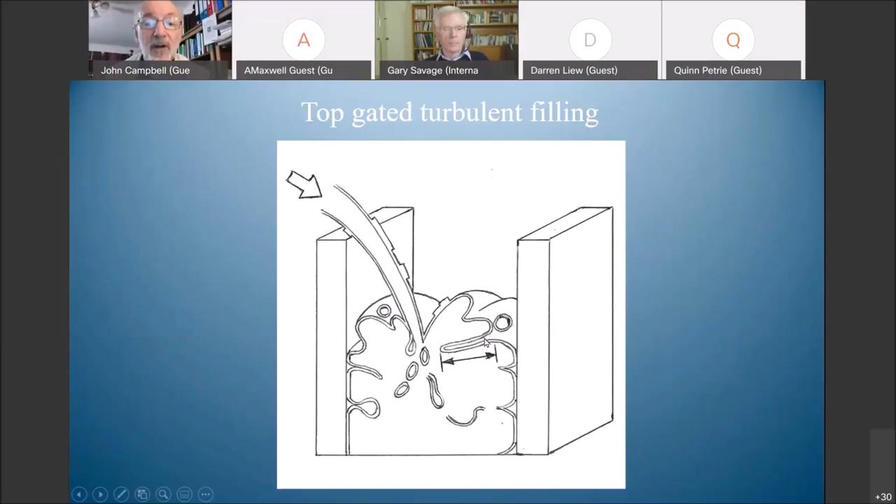So here we are. This is where our casting technology is today. We're pouring things, we're folding in the surface, we're making these double films like cracks in the liquid, and we're making bubbles. These are the two entrainment defects. And these are the kinds of things we're doing when we're impinging other drops on the surface. We impinge in a bifilm. When we fold over the surface, we fold in a bifilm. Whatever we do, bifilms are the result, and they are cracks in the liquid.

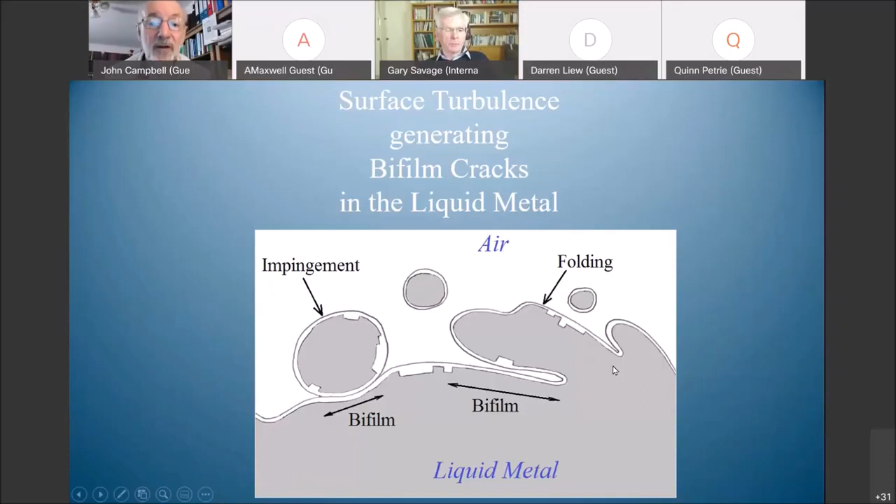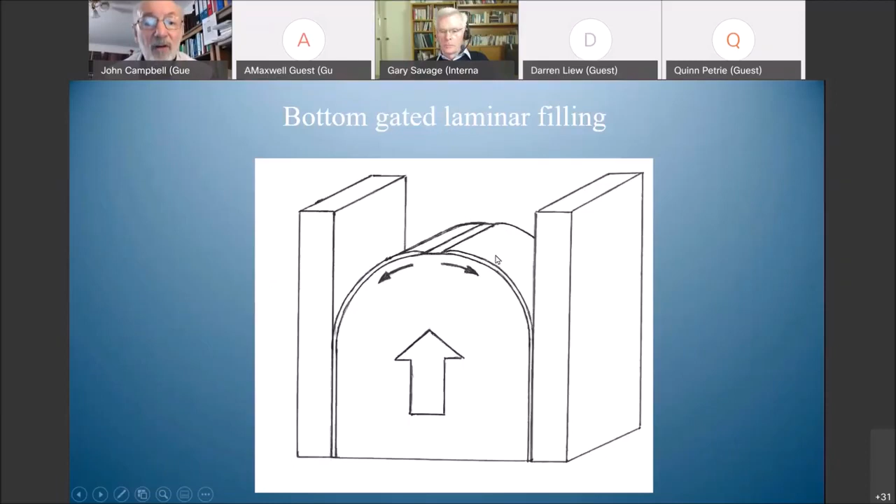And this is what we have to do if we want to avoid them. This is the way we should be filling castings. We should be gating them so they're actually filling uphill inside the mold. And then we have a chance of making a really good casting. So these are the two major defects, the bifilms and the bubbles.

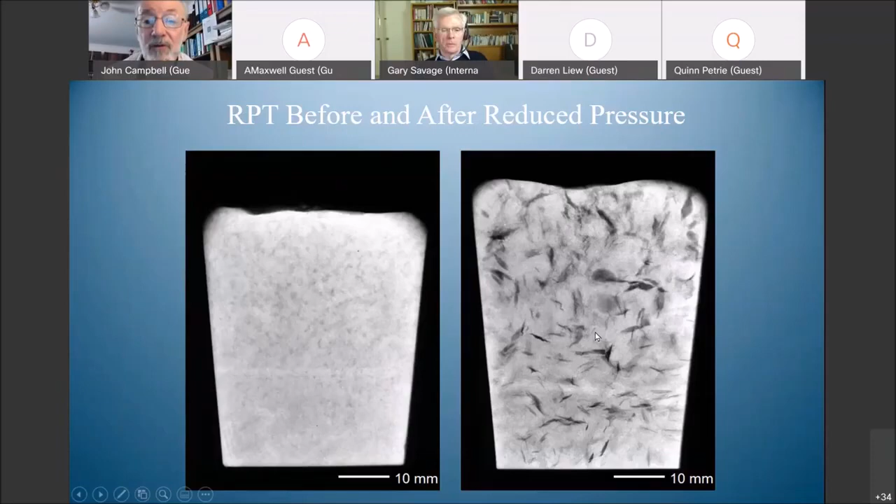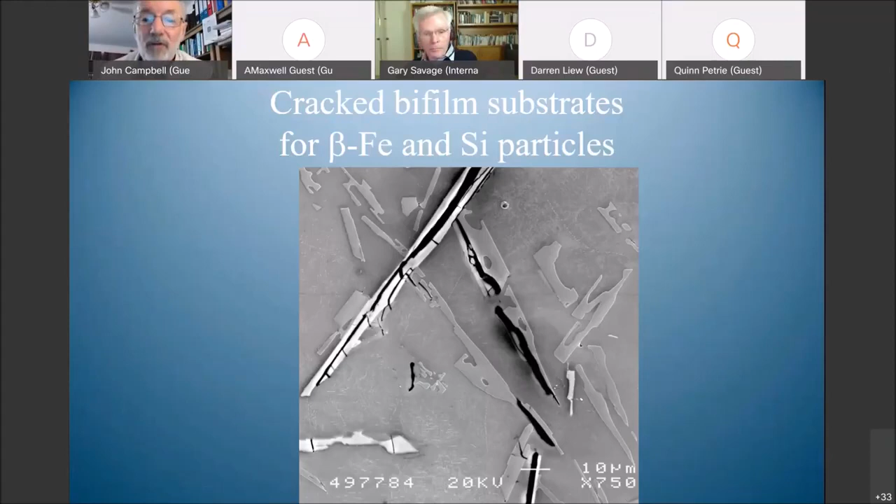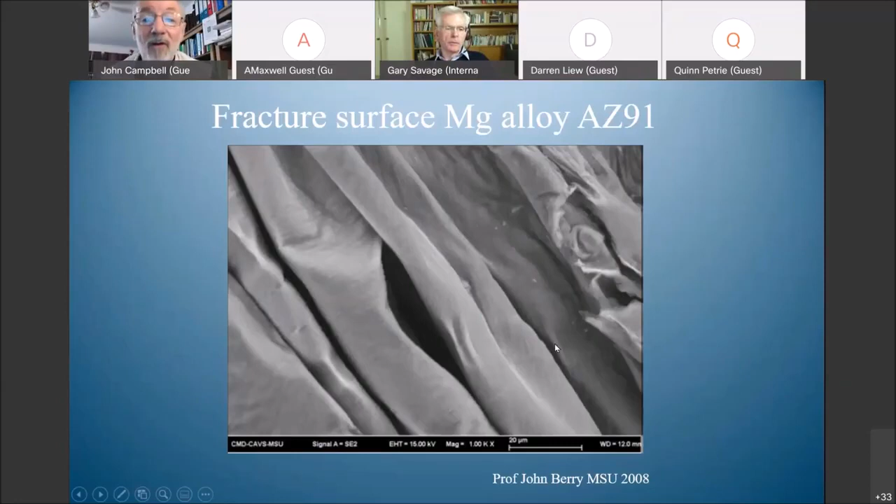So these bifilm cracks explain.

Hello, I seem to have competition.

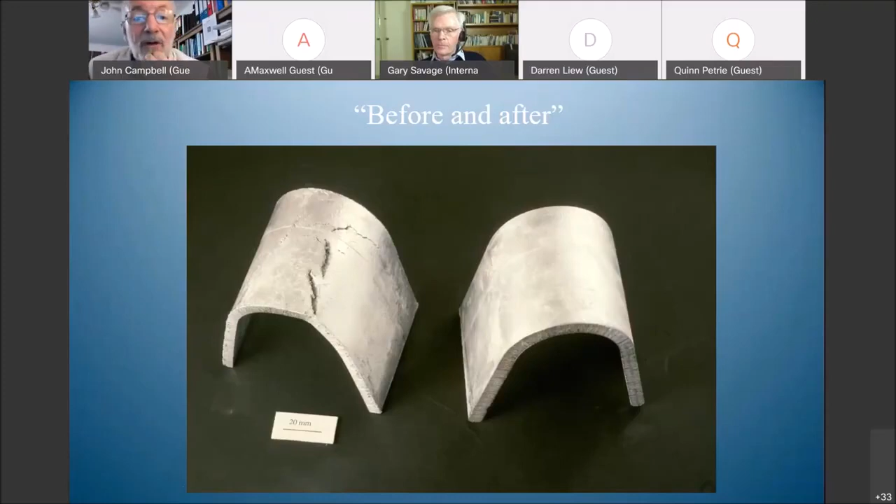The bifilm cracks explain things which would be very difficult to explain by conventional metallurgy, because conventional metallurgy would say pure aluminium cannot crack. It's not possible.

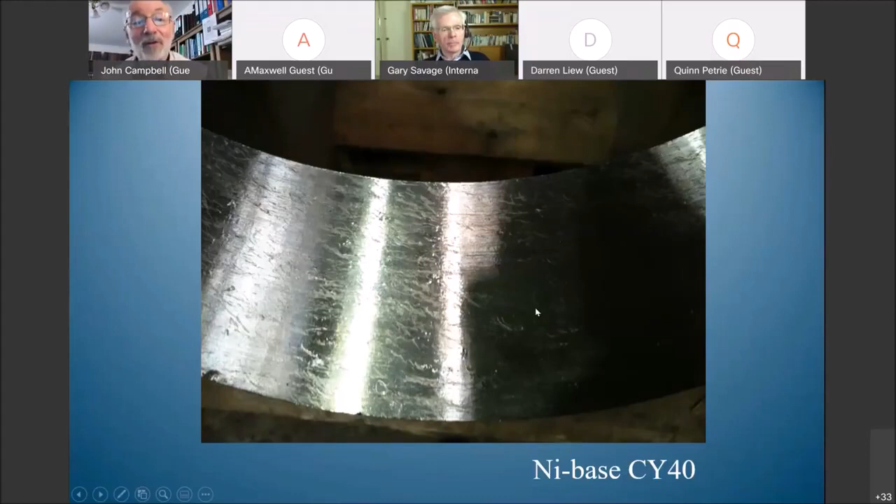So here we have a nickel base alloy. This is the CY40, I don't know whether any of you know about it. And here on the surface, the rather blunt cutting tool has torn open the bifilms, so you can see them everywhere. I mean, it's a bit of very bad turning, I have to say, but it's also a very bad casting.

That it's full of so many bifilms. And here's another CY40 casting where the bifilms are much larger now, fewer of them, but they're just huge in size, centimeters long.

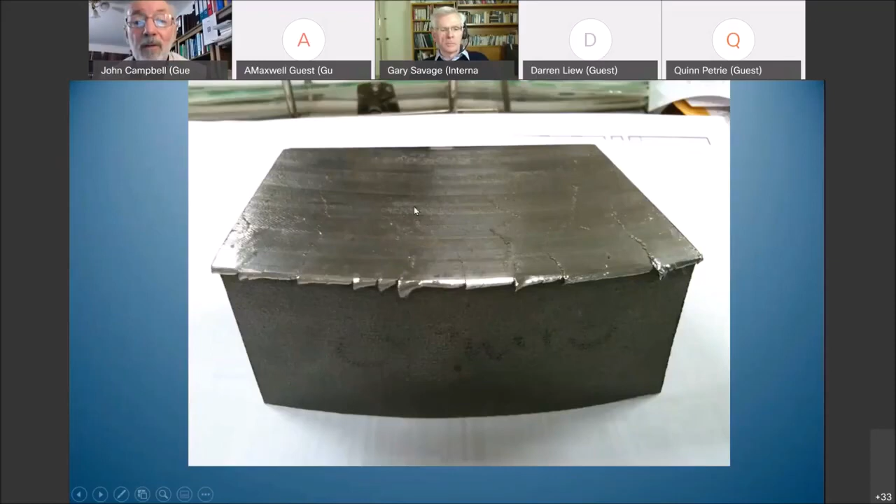So let's move on now and look at the control of both microstructure and the mechanical properties by bifilms. As a metallurgist, and I look towards castings, I've been brought up to say that the microstructure controls the properties. And more, I've come away from that point of view. I now look upon it as the properties mainly controlled by bifilms.

Whereas I used to think that they were controlled by such things as heat treatments and such like, and clearly there is quite a lot of control by heat treatments, but there's even more control by bifilms. So bifilms explain a lot and are very, very helpful to our understanding.

And this is one of the mechanisms which happens with bifilms, that they get - I don't know whether you can see my cursor - but as the dendrites grow, they tease out and elongate and straighten bifilms, and they push ahead. The remnant of this great heap here is being pushed. But this straightened bifilm now becomes a straight crack, like an engineering crack, and so becomes really extremely important in terms of properties.

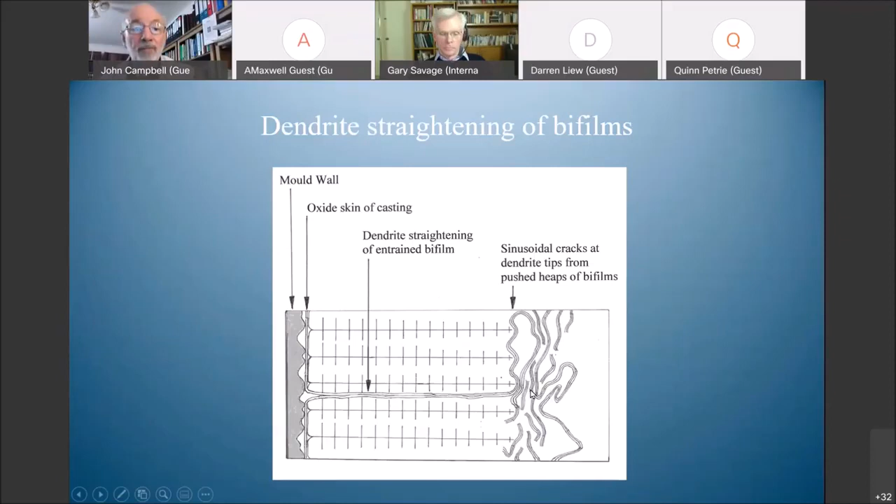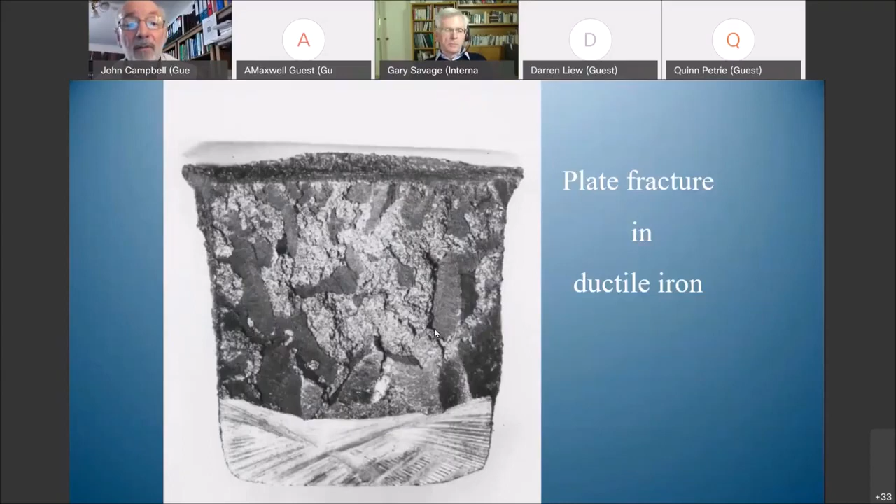And here's cast iron with so-called plate fracture of ductile iron. I mean, this should never happen, that we get brittle fracture of grains like this in ductile iron. But it happens because of bifilms.

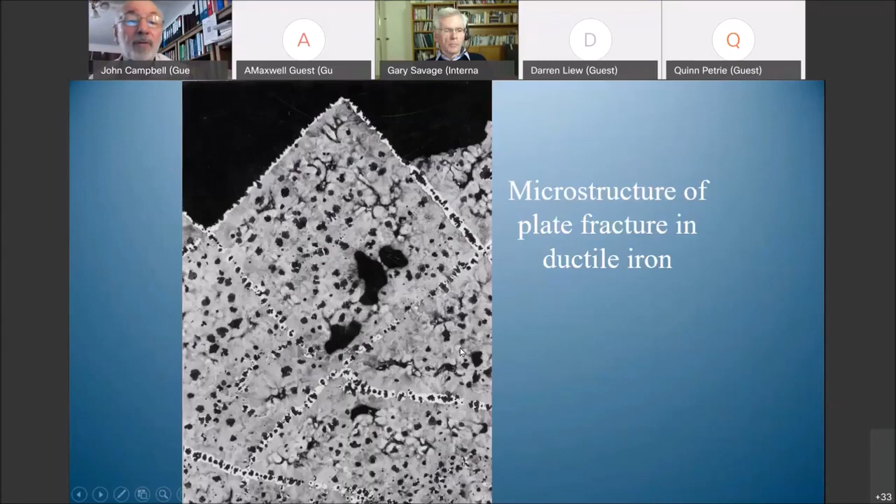And when we slice the structure and look at it, these are the lines of the bifilms. I mean, this is just an amazing structure, which you'd have no hope of explaining without some knowledge of bifilms. So...

Let's get on to the meat of what I really want to say today. This is the theme of my new book.

Whoops, I need to go back. So the inclusion is brittle and the inclusion cracks. So the logic is we start with the inclusion, we provide stress, and finally the inclusion cracks. It's a 1, 2, 3. Now it's interesting. I'm going to tell you now, that's completely wrong.

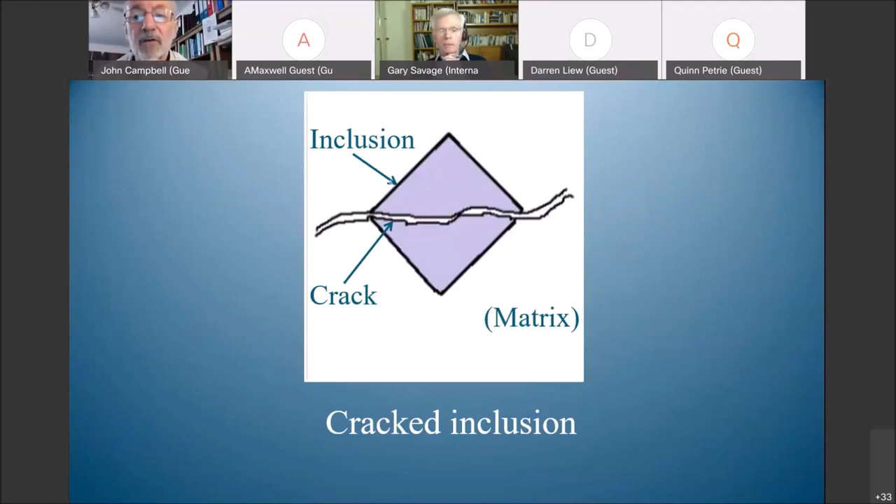The reality and the way to describe this scenario of the cracked inclusion is this: the crack is there first. The inclusion grows on the crack, and stress is never involved. So the thinking of our metallurgy starts to be absolutely reversed. The normal logic is inclusion first, then applying stress, which results in a crack. Now we reverse this: the crack was there first. There was never any stress, but the inclusion grew on the crack and therefore appeared to be cracked.

There's no doubt that this second logic is correct. We now have lots and lots of evidence, and this evidence is only a repeat of what the famous physicist Griffith, an Englishman who worked at our National Physical Laboratory over 100 years ago, predicted: that in every case of metal failure, the cracks were there first, pre-existing. So this logic is just a restatement of something that's been around for 100 years from Griffith.

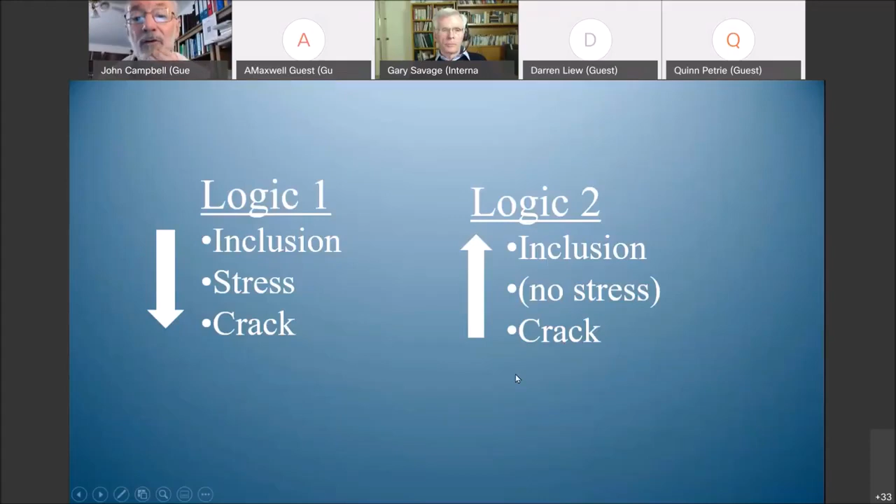It's important we know what's happening here. What makes ductile metals ductile is that if there's a crack—say we put a hacksaw crack into some ductile alloy like an aluminium alloy—and we try to open it, as we open it, the crack doesn't extend. Microscopically, at that stress point, the crack puts out dislocations and suffers plastic deformation. All that happens is the crack opens and gets wider and blunter as we apply stress. The crack does not extend or grow; it just gets blunt.

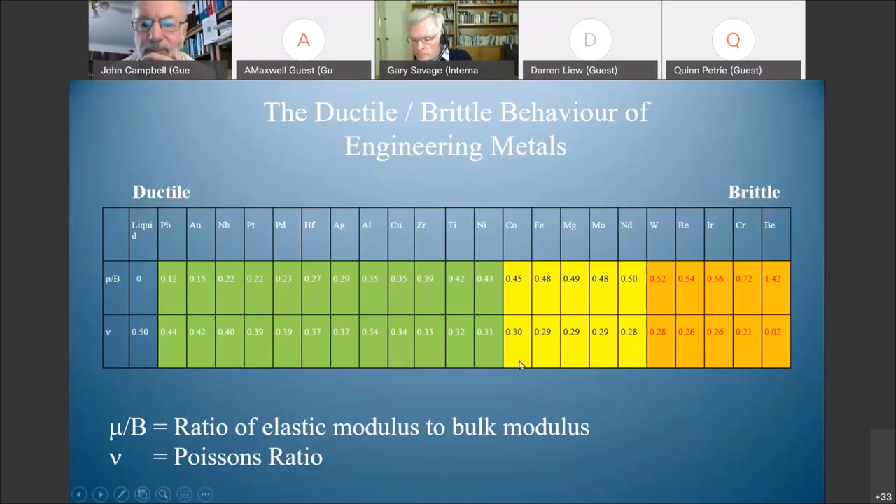Because when Griffith, our famous English scientist, thought about how cracks extended 100 years ago, he wrote down a little theoretical equation based on energy. It's been a very good equation—huge amounts of our understanding of cracks has come out of this.

But there was a second chap, Barenblatt—what a name. He's Russian, and until quite recently he was still at his Russian Research Institute in Moscow. He did a crack model as well, and his model was fascinating. He considered the solid, and considered that there was a region in the solid which had no cohesion, surrounded by a region of strong cohesion.

Now, when you work out whether this is going to propagate as a crack or whatever it's going to do, interestingly, we come up with the Griffith model. So these two models actually give the same answer.

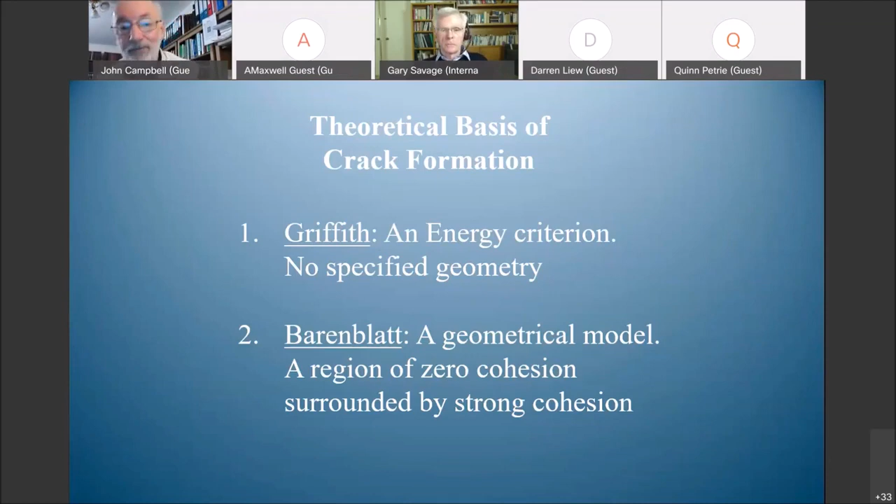I can't tell you how proud and relieved I was at that point, when I realized that bifilms had come home. They were now respectable, and they now obeyed all the logic and mathematics of standard crack equations. Okay, so let's move on and talk about the different ways in which metals fail.

So let's deal with the very simplest way of all, where we just put a tensile test bar in a tensile machine and pull it until it gets overloaded and breaks. This is pretty simple stuff, but you can see what happens when bifilms get in the way. This is our CY40 nickel base alloy, which we've cast beautifully badly, cramming bifilms into it, because this was the world's most rotten running system I ever saw. I played hell with the foundry and told them they deserved what they got. They never did it as badly again, and now they can cast test bars that look beautiful with decent elongations. Well, actually this had a decent elongation too, but not by plastic flow - by opening of bifilm cracks. So you can see it's an unbelievable situation in which the bifilms are totally in control of this overload fracture.

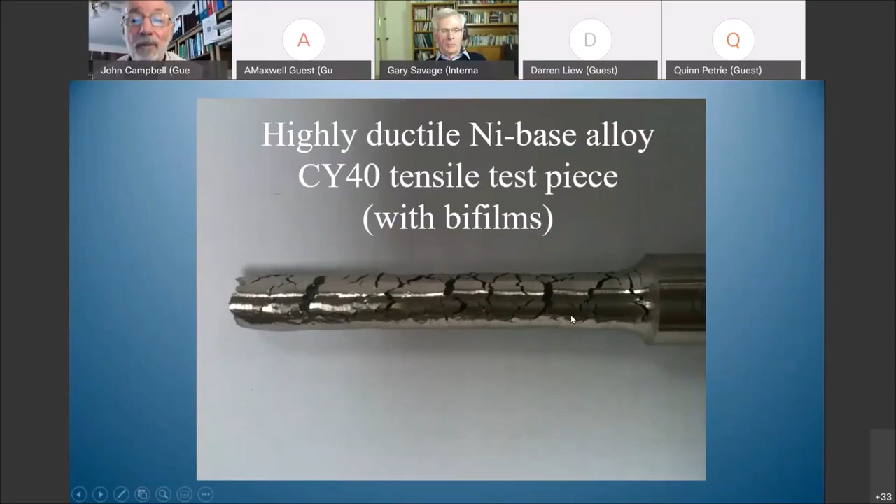So let's move on to some more interesting mechanisms - let's talk about creep fracture for a moment. I want to talk about a result you may have heard me mention before, where we're looking at the amount of creep deformation with time. I should tell you this is a nickel-based super alloy for this result.

Cast in vacuum, incidentally, of course. So if we look at our standard equiaxed casting, a normal casting with normal grains growing randomly, and we pour it in a standard turbulent manner, we create bifilms. Now we grow grains in amongst the bifilms, and the grains expand as they grow. As the grains move, they push the bifilms ahead, and finally the bifilms become trapped between opposing grains, so the bifilms finish at grain boundaries automatically. This equiaxed casting would have bifilms at practically all of its grain boundaries, all over the place.

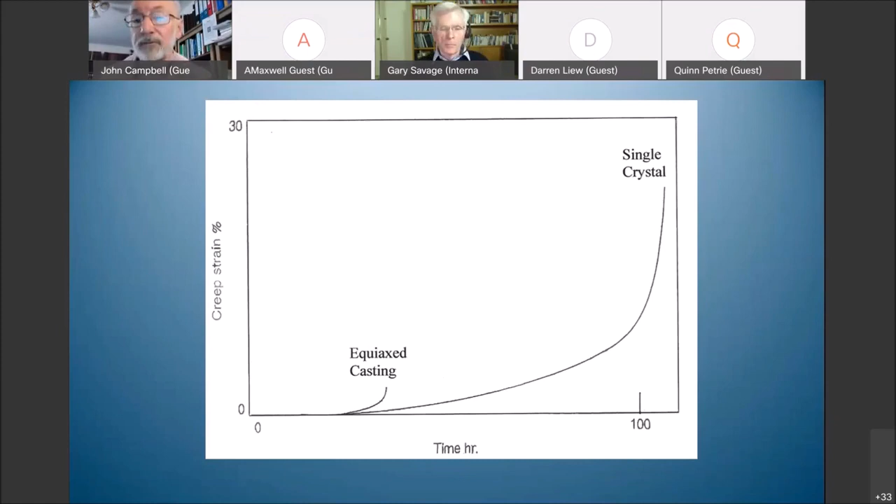Okay, so you can see there's terrific potential for affecting the creep of metals. And just in case you were thinking that's a bit of a one-off, let's talk about this situation where we're going to discuss heat exchanger steels.

I want to tell you about the new creep theory of Brian Wilshire. I don't know whether any of you know Brian - he was professor of metallurgy at Swansea University, a great larger-than-life man with a great booming voice. We could just about hear him up in Birmingham.

But he proposed a new interpretation of the creep equations. Whereas all those metallurgists among us will have learned that there are three parts to creep - there's the initial transient, there's the steady state, and then there's the final transient.

Brian said this is rubbish. There's only two parts: an initial transient and a final transient, and where they overlap appears to be the steady state. What he did was derive equations for the initial transient and an equation for the final transient, and this gave a fantastically improved way of predicting creep lives, certainly for steels, and maybe it's good for other things too. I wouldn't know.

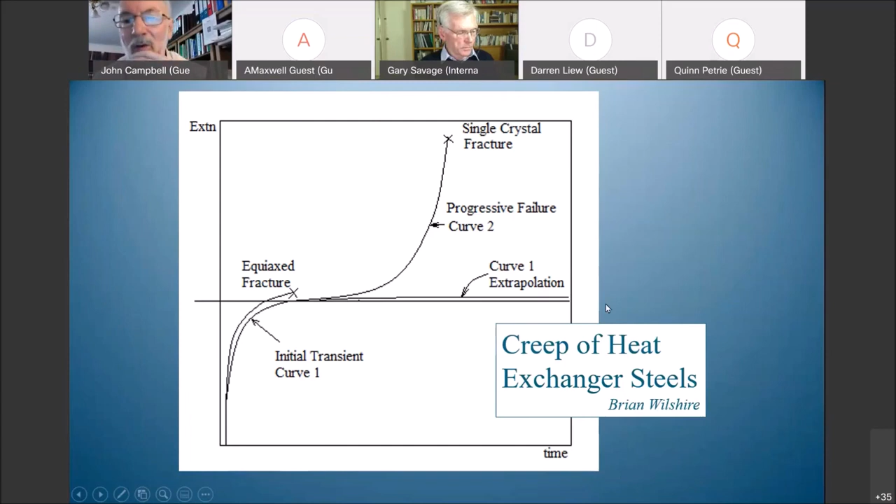Now this hasn't been proven yet. I'd love to see someone attacking this and seeing if we can't prove it. This should happen for all our heat exchanger steels. It would mean that our heat exchangers in power stations, as well as nuclear stations, would last maybe 5 times as long. It would transform the economics of making electricity. So this is an enormously important prediction, which I'm just loving to see someone confirm if they can.

So let's move on and now talk about fatigue. Fatigue is something that worries me a lot. I want to talk about 3 different aspects of fatigue, or 3 examples: the failure of wind turbines, aero engines because of turbine blade failure, and helicopters. This is deeply tragic, the way a helicopter falls out of the sky because we got our castings wrong. We shouldn't be doing this. We shouldn't be supplying to the world bad castings. And so these are all serious and pretty tricky.

The wind turbine, I guess we just deserve what we get here. You see, wind turbines are designed for a 20-year life. The main bearing of the turbine, the huge bearing which takes the main weight of the blades, is subject to massive stresses. These are designed to last for 20 years, but quite a number of them, a high proportion, are failing after 5 years. This is threatening the economics of wind power because it's so enormously expensive to lose your turbine after only 5 years and have to dismantle it, take the whole thing down, rebuild it, put it all up in the sky again. So this is one of those things which shouldn't be happening.

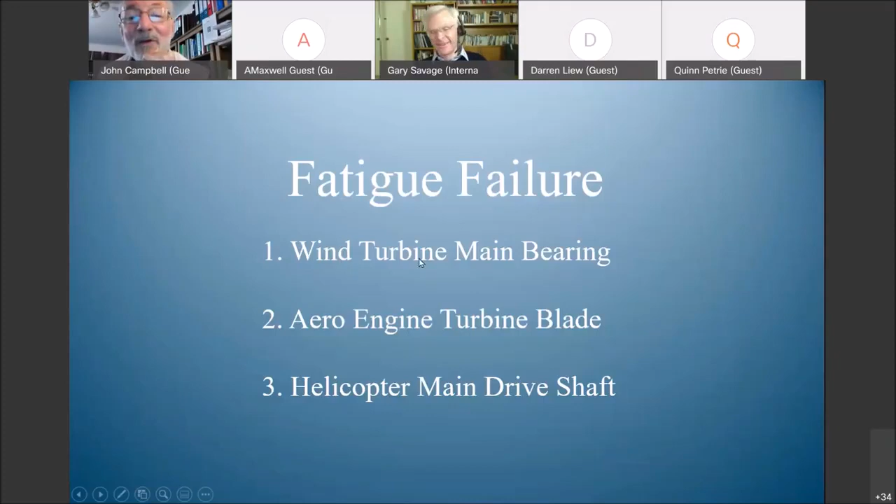I write to Siemens and say I think I might be able to help, but they write back and say we know what we're doing, get lost. So I say the lives of their bearings at the moment is something that, as I say, we deserve what we get. Here is the contact surface of a typical bearing, and this is the typical structure underneath that surface, which has been viewed as fatigue cracks generated by the rollers which roll over the surface. These rolling stresses, repeated rolling stresses over the surface, are at something like 2 gigapascals. I mean, the stresses are horrendous. So it's not surprising that great chunks of material finally fall out and get into the bearing, and then the bearing does a macroscopic disintegration.

But the interesting thing for me is to see that these cracks are, of course, completely misinterpreted. Remember that Griffith would say the cracks are there first. And here he is, he's right. These cracks are here first. They're put in by us, the foundry people. These are the cracks we put in by the turbulence of pouring.

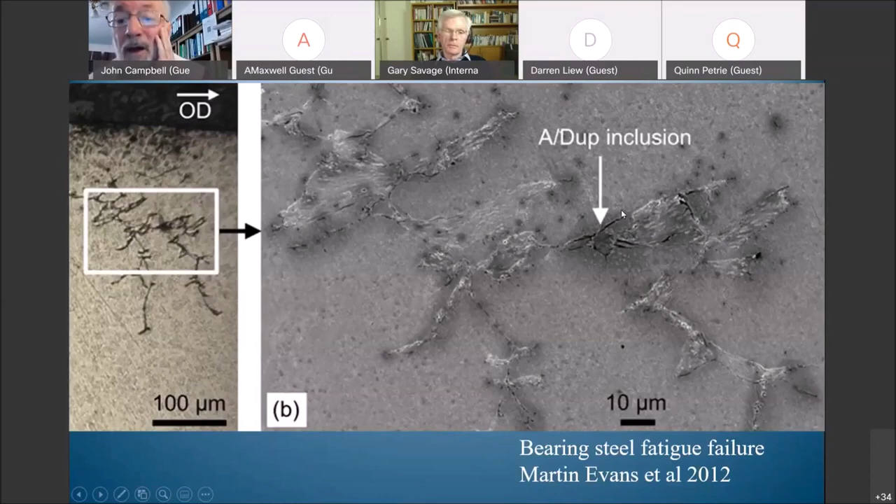So what's happening, if we go back, here is a tiny fatigue event taking place, where the fatigue crack is moving out step by step, making beach marks to show its progress, cycle by cycle, extending. So there's an extending crack in here that's fatiguing away. Probably at other places throughout this network of bifilms, there are little fatigue events going on which are linking up these big blocks of material. Once the little connections go, because they're now subject to massive overloads of stress, once they go, then this whole section here will jump out into the bearing and start to trash the bearing.

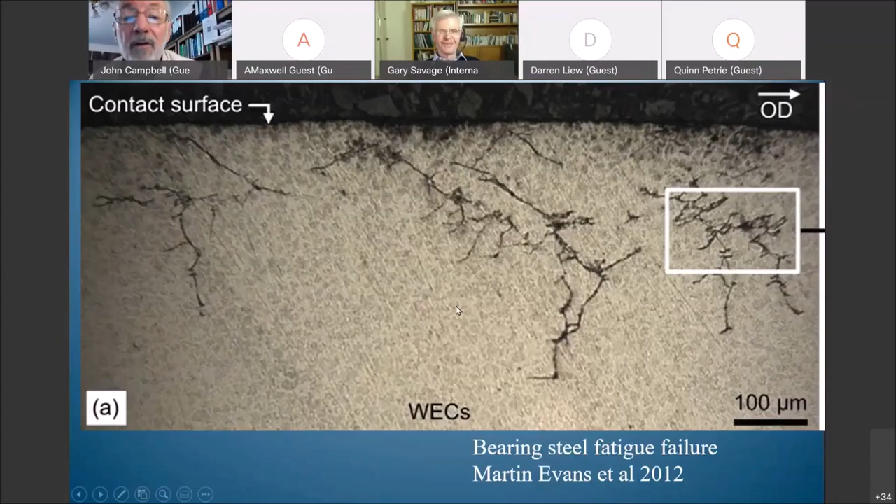So the wind turbines are failing because of the very poor casting practice in steel making operations. And I say it serves them right. They should get some decent casting practices in place. And I'm fed up with talking about it.

So let's move on and talk about this compressor failure, from a single blade that broke but took out most of the other blades as it went around. This was part of a little engine in a Cessna, which then subsequently crashed and people were killed and seriously injured. So it's quite a tragic failure.

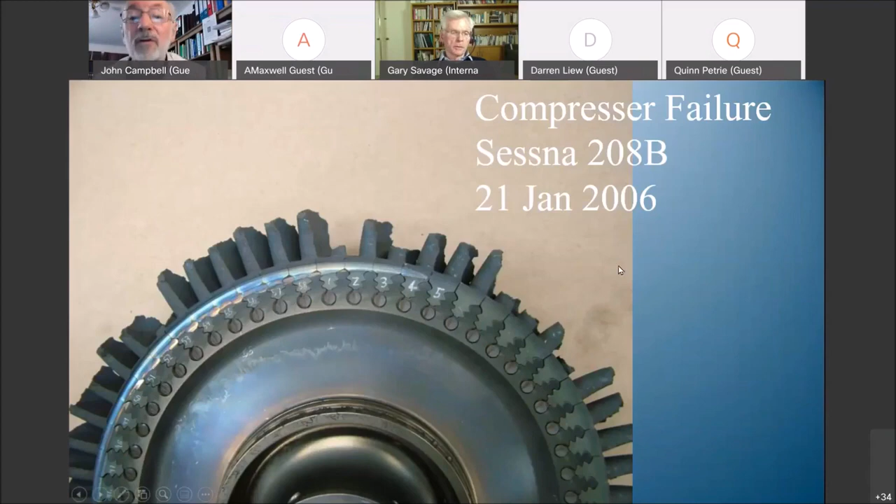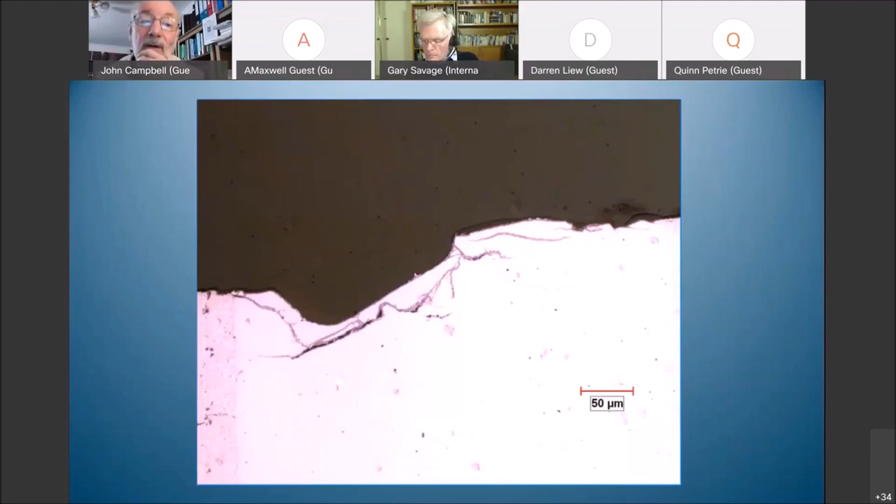This is a hallmark, a distinguishing feature of bifilms. You remember them growing because of the way the dendrites move, and as the dendrites progress, they straighten the bifilms between them. This is an instance where, here's a better view, where we have a single grain here, and bifilms must have grown in this direction. So here we have our bifilms flattened out in crystallographically flat areas. This is a kind of facet on the fracture, and these would have been facets if it had fractured here, but didn't.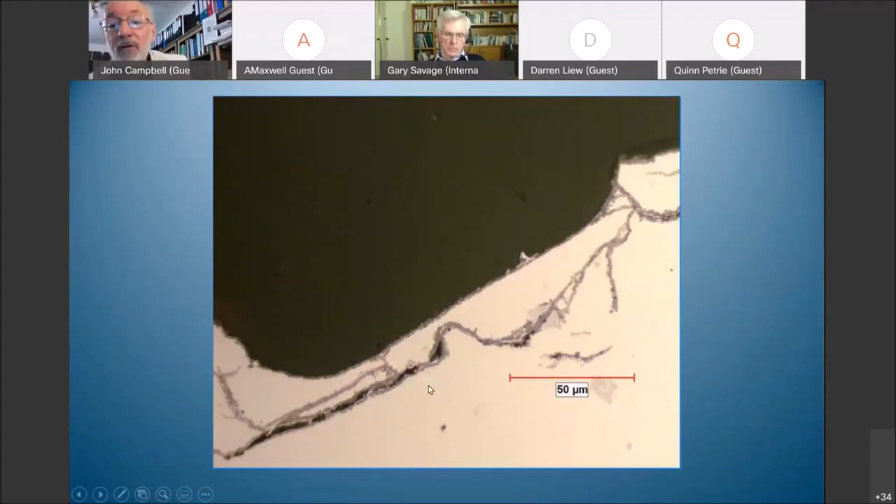But the fact that these are parallel tells you this is a bifilm. Now, it can't be that these are cracks caused by stress, because once one crack is generated by stress, parallel cracks then can't form, since the stress is now relieved, dissipated by the first crack. A second and third cannot form. Whereas a bifilm doesn't care about that, it forms just because no stress is involved. So these are definitely bifilms.

So this is a typical bifilm failure. And again, it's a great pity that the world of turbine blade manufacturers still to this day cast relatively poorly, and so we still have bifilms in turbine blades which should never be there. It's a great pity, and it's time we stop doing this.

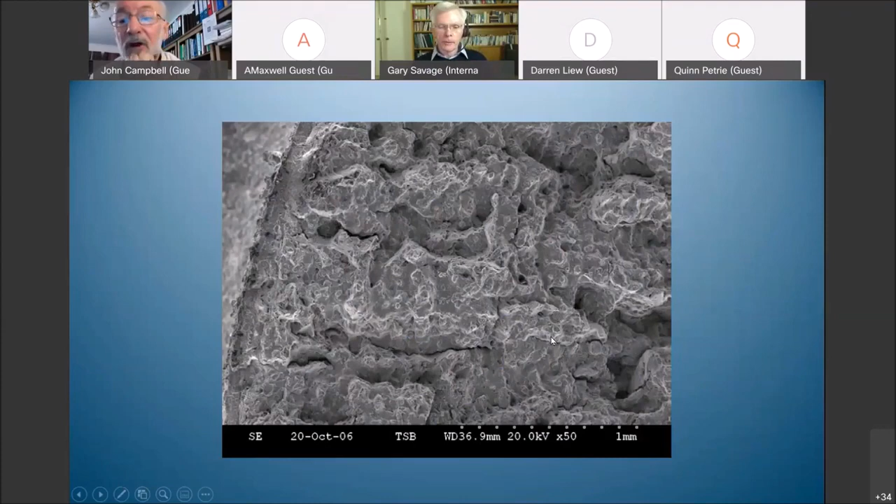Now let's move on a little bit and talk for the moment about corrosion and bifilms. Of course, if this is a bifilm, these are some of the precipitates that form on bifilms. They like to form on the bifilm because the volume change and the shape change are easily accommodated by the gap between the two films. And in doing so, the precipitate actually prises open the bifilm a little bit.

So as these grow and they prise open the bifilm, you get corrodant sucked in. And the corrodant now can corrode very readily because this is a really good corrosion couple. So there's a good chance of having very active corrosion couples, and so corrosion happens from the inside of our metal because the bifilm is in there.

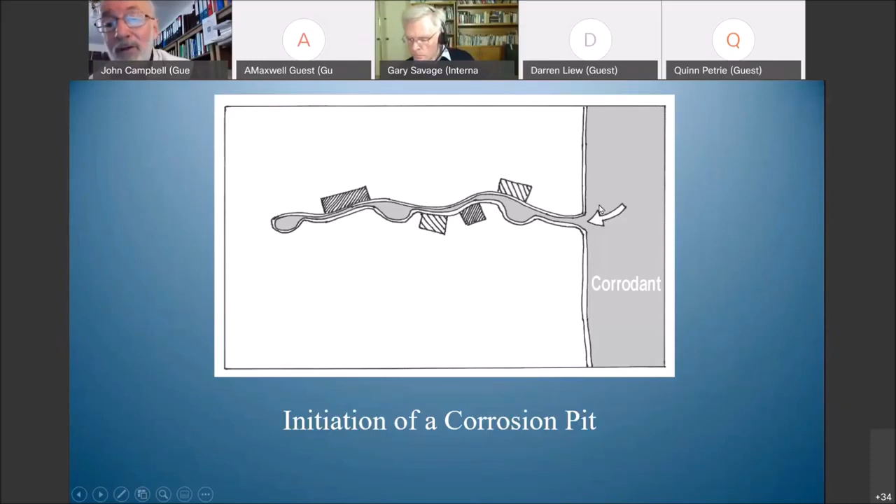What happens then is that particularly the entrance here grows significantly, and here we are, we've formed an etch pit. And here we are with our bifilms. Again, if I was wearing my standard metallurgist hat, I would have said, oh, this is very strange. An etch pit has led to cracks.

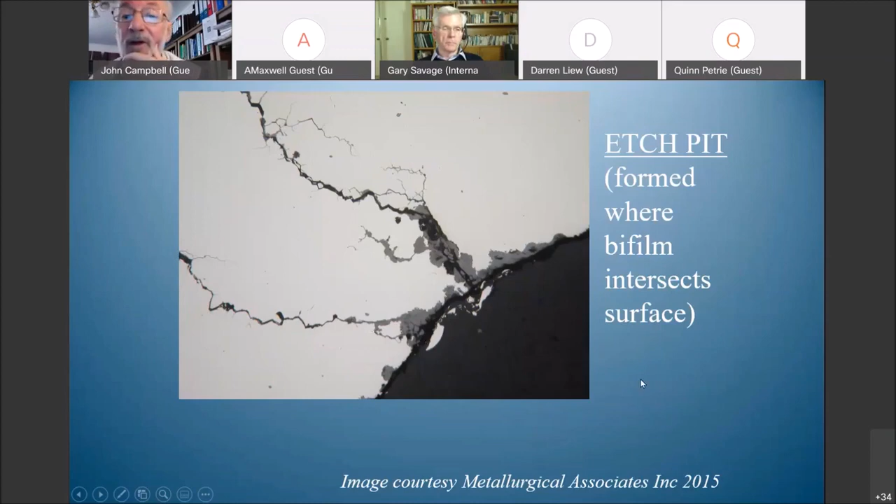Well, that answer's wrong, of course. The cracks were here first, and the etch pit forms because of the presence of the cracks. So again, the cracks are pre-existing. They're put in by us foundry people, by the way we cast our metals. So the etch pit is merely telling you that there's a bifilm emerging at this place. The etch pit is a tiny defect, but the crack can be enormous at the back, and it's that has to be feared, not the etch pit itself.

I'm moving on now to talk about helicopter failures, and in particular, I'm going to talk about vacuum arc remelted steels, VAR steels, the most expensive steels you can buy, the most difficult, long-winded, extended process known to mankind.

Anyway, you start with an electrode up here, you pass a big current through it, it melts the tip of the electrode drop by drop into an ingot down below, which solidifies. But as it solidifies, we get cracks.

Now, these cracks are known about. In fact, if you were to take this ingot and try to forge it, it just cracks. It cracks straight through. And that's despite the fact that this would be, say, a nickel-based alloy, which can't crack because it's ductile. If you have a crack in it and try to extend the crack, it won't extend, it just blunts. But here we have a nickel-based alloy, say, in which when we go to forge it, it cracks right through. And just the ingot will often fall into pieces. This is not a trivial failure.

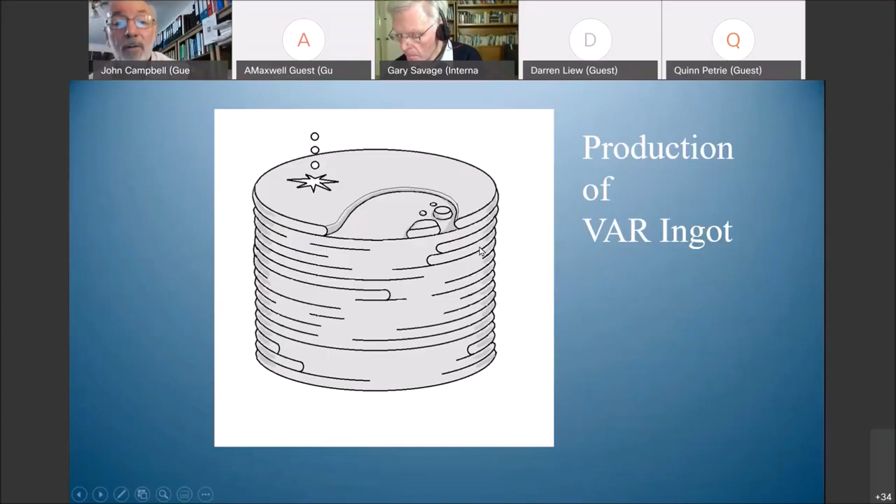Now, just by going back here, what you can see is I've got a peel depth here. Some of these cracks are machined away. They're ground away or they're turned away to a depth of about 5 millimeters. However, although I show this crack just a little further out and a little further out here, it's only just recently I've come across evidence whereby these cracks are up to probably up to 50 millimeters deep. So we've got 50 millimeter deep cracks with only 5 millimeters machined off the surface.

So here we have this extremely expensive steel with cracks 50 millimeters long in it. It's very difficult to find the cracks because they're very thin. They were put in vacuum, so there's not that much oxygen. So the bifilms are extremely thin, so you can't find them, but they're still very efficient cracks.

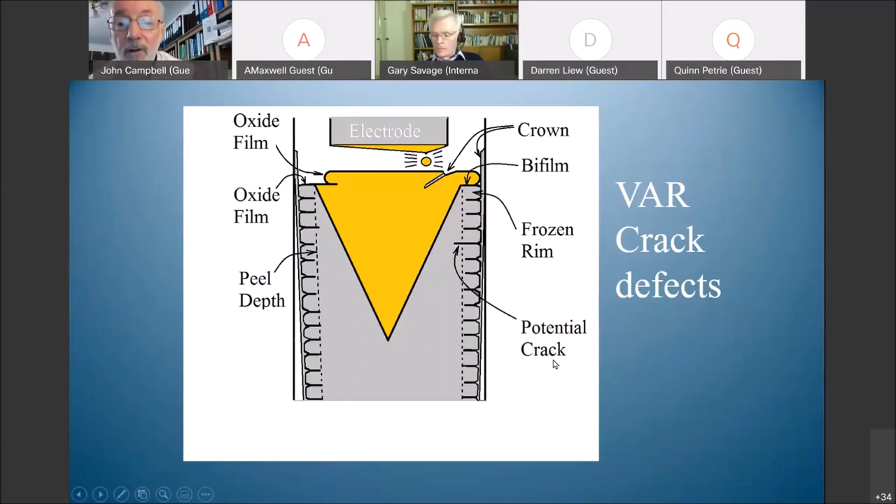And here is one of these cracks. Look, 60 millimeters long. This is the thing under the microscope. It's a very messy sort of crack. This was observed by people at Cambridge University when they bought a bit of steel, and they bought the best steel they could afford, thinking it was going to be free of defects, and they found this 60 millimeter crack in it. Just totally remarkable.

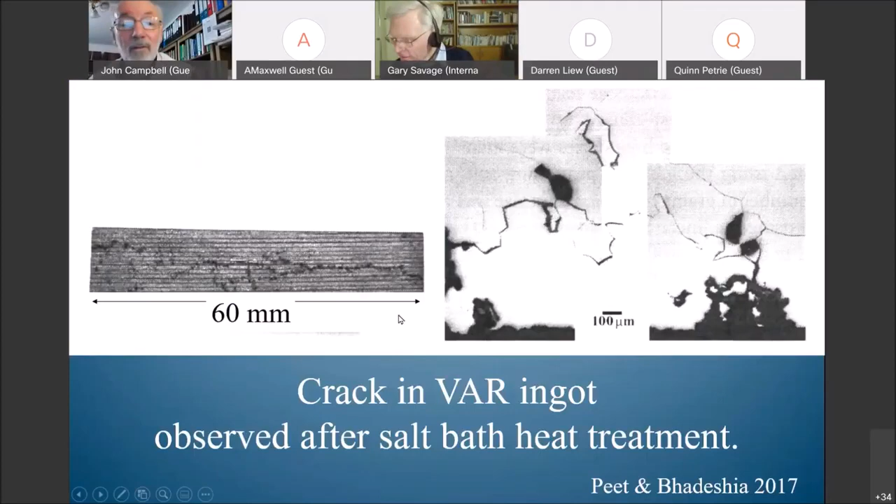And here we are. I don't know whether any of you have been around helicopter building operations. They're truly amazing facilities. This is one I haven't seen in Brazil, but I've been around others in the world. And the helicopter people go to a lot of trouble and spend a lot of money on getting them as right as possible, and who wouldn't? However, they are victims of us as misguided metallurgists making steel with cracks in it.

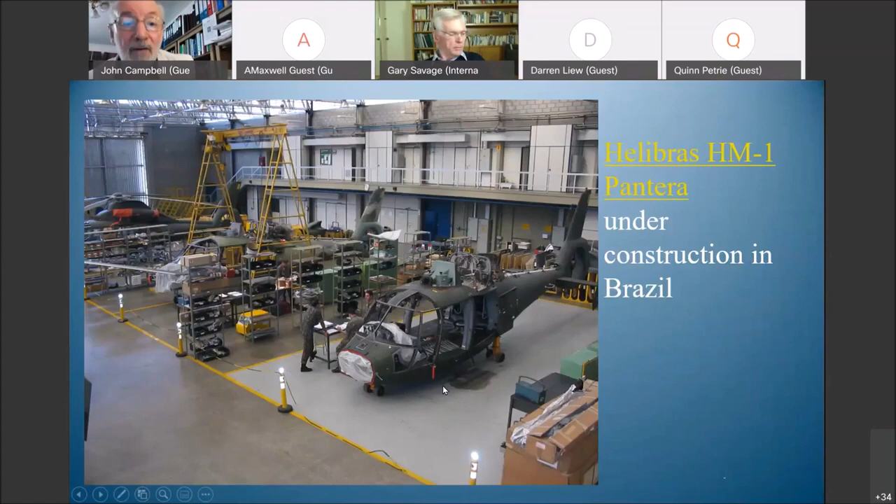And when you look at over the years, just of the last few years, the last decade or so, from 1977 onwards, practically nearly all of these mechanical failures are vacuum arc remelted steel.

What's quite interesting is that these 2012 failures, when these helicopters, these Pumas, ditched in the North Sea, fortunately no one was killed because they landed nicely and the floats kept the helicopters afloat. But both of them failed from fatigue failures from corrosion pits, which, as we know, is not possible because the corrosion pit is too small to initiate a failure.

None of the world's experts could understand why these had failed, because the failure was impossible from a tiny, tiny pit. And many of these gearbox and main drive shaft parts are made with safety factors of 5. They're not lightweight components. They're built with enormous strength, and they still fail.

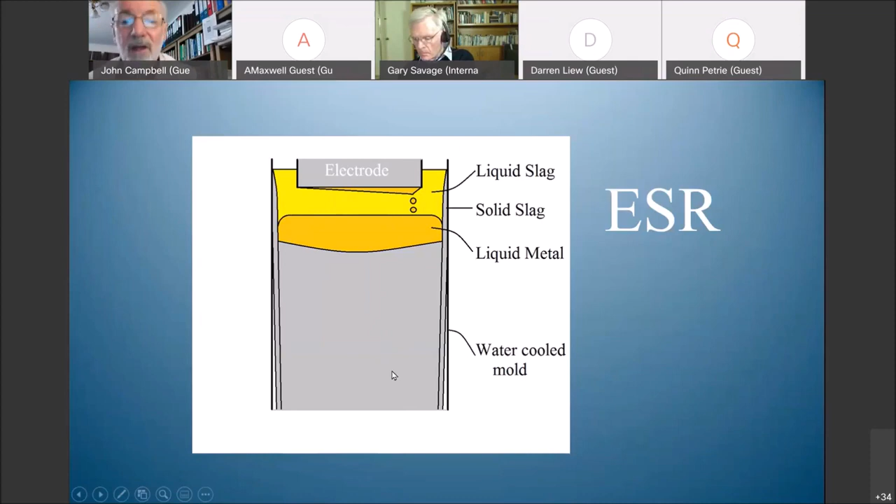I don't care that it's poured in vacuum, we still create bifilms in vacuum, so this thing has great cracks through it. Every now and again, a part will fall off into the melt, giving a massive defect. So even this excellent process, we're doing it badly at present by casting the electrodes badly, which puts faults into the ingot that need not be there. This could be an excellent process, the first and only reliable process to deliver a reliable steel, and we're messing it up at present. But it need not be messed up, and I look forward to the day when it is.

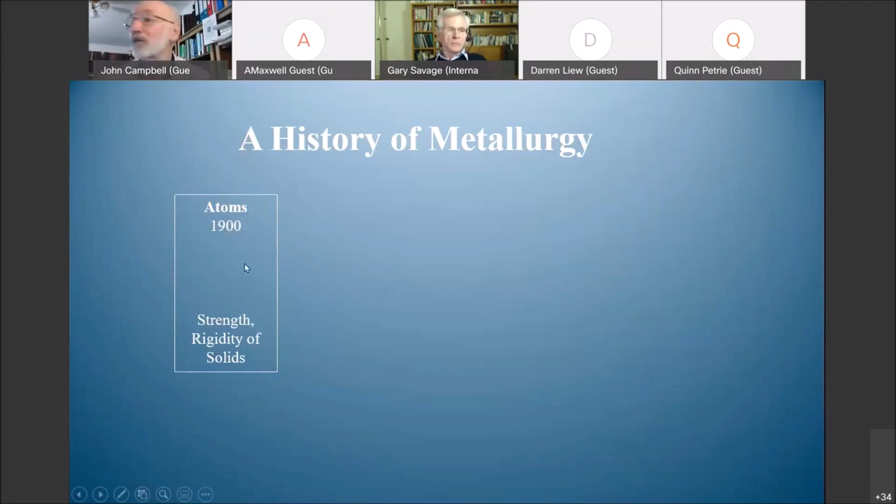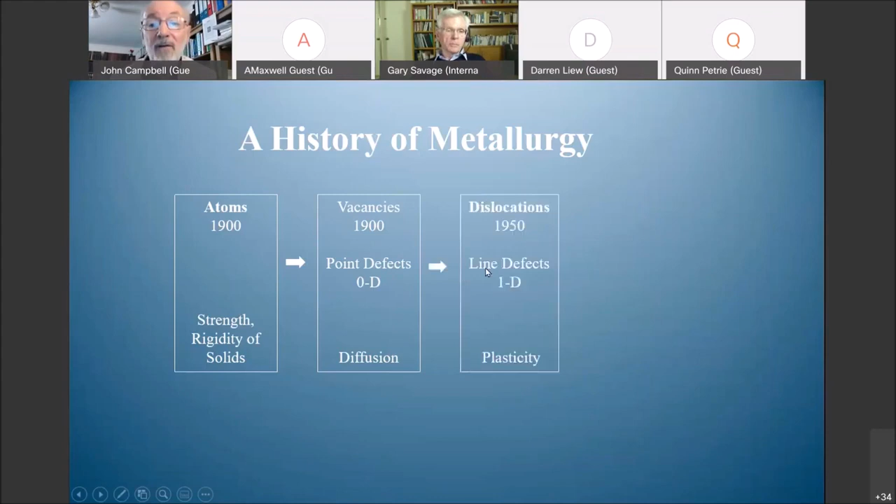So, just quickly having a look at where we are in metallurgy. Atoms were discovered in about 1900 and explained strength and rigidity. Then people realized there were vacancies, which gave us point defects, and suddenly we could understand diffusion. Then we got line defects, and suddenly we could understand plasticity. And I like to think that now we've got planar two-dimensional defects as bifilms, and for the first time we can understand fracture.

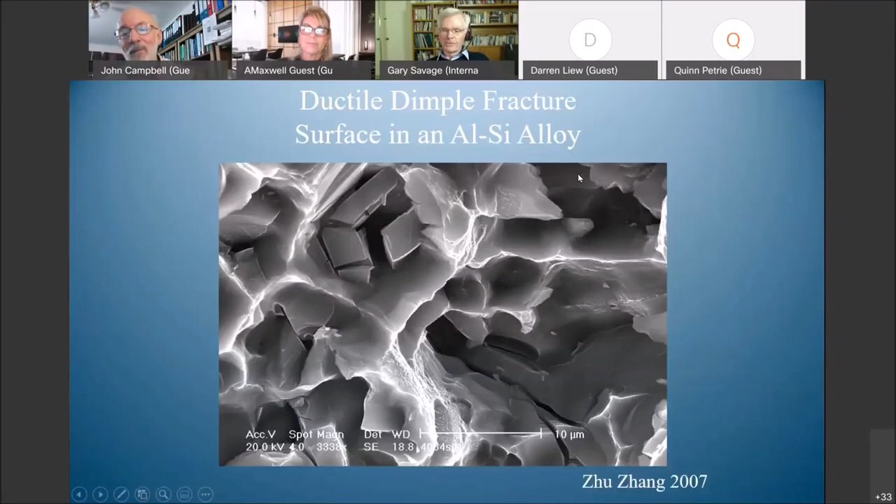Others are being a bit cautious with their questions. Get in there, I'm sure you've all got lots of questions. I've got a page of them here, but I'm reluctant to start on them until you've all had your go. They're still reluctant, John—you better start then, Gary.

Early on, you were saying that precipitates form only on bifilms, and that begs the question: if we don't have any bifilms, what's the microstructure going to look like? That's a very good question—I'd be really interested to find out about that. You have speculated about the aluminium silicon system, that if there weren't any bifilms, you would get the modified silicon structure.

Yes, and that actually is known. There has been some research, particularly in China, where a young Chinese researcher looked at aluminium silicon alloys straight from the smelter before anyone had a chance to mess them up. What he found was that the modified silicon extended right up to about 16% silicon, and in every case it came out as a eutectic and would have continued, except that he then raised his silicon by adding lumps of a higher silicon master alloy, which was full of bifilms, and that wrecked his experiment, which of course he didn't understand. So we thought there might have been a limit, but I don't think there's a limit—without bifilms, you can't precipitate the primary silicon, it can only grow as a eutectic. So that's an interesting example.